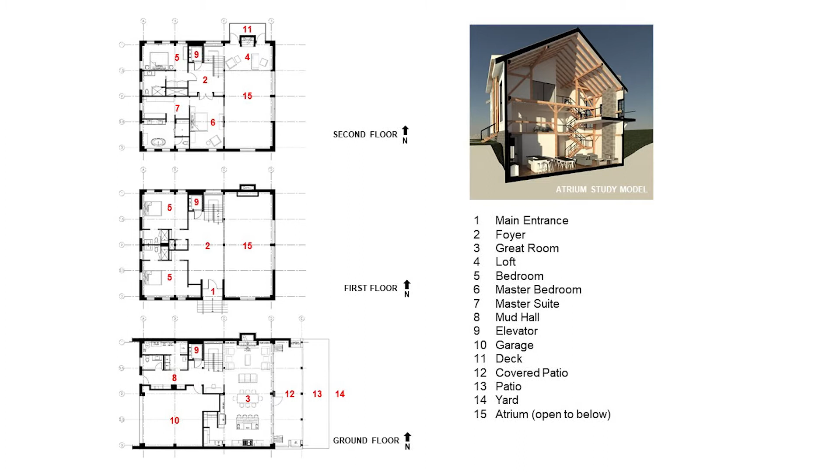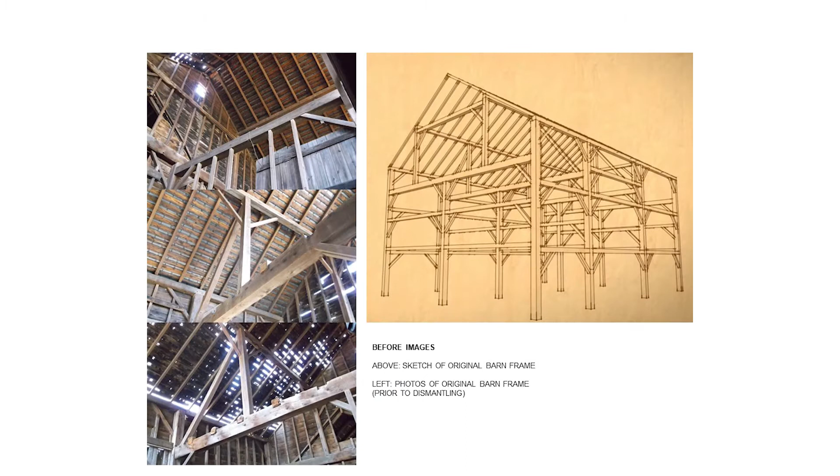Transplant barn. Jen and Phil dreamed of a house to serve as a generational gathering place for their family. They envisioned a new atmosphere that reflected their unique personalities and was rich with history. Jen's strong sense of simple design and Phil's New York State roots led them to a structure that once served as a hay barn in a rural area near Schenectady, New York. They decided that the dismantled frame of this old barn, an early 19th century heavy timber structure, was destined for resurrection 500 miles away on a wooded lot in Hudson, Ohio. Its skeletal frame would be transplanted and their house would be built around it.

With such a clear vision outlined by the clients, the architect's role was to carefully navigate the design process and surgically graft this frame into its new environment. The primary goals expressed by the client were to reassemble the frame as close as possible to its original form, clearly express and celebrate the heavy timber members, and create the soaring, volumetric feeling of a barn. Obviously, there were very specific programmatic requirements, and much effort was spent to ensure functionality while maintaining the purity of Phil and Jen's overarching design criteria.

The design solution started with the siting of the structure. Influenced by traditional bank barns, the ground floor was set below grade and constructed of masonry, rooting its foundation into the earth. This move provided visual screening from the street, creating a stealth garage entrance on the west and establishing a private exterior patio and yard extended to the east.

Lowering the structure also helped to scale down the massing of the three-level house. The east-west orientation allows eastern sun to permeate the great room in the morning and places the main entrance on the south elevation to formally address the street.

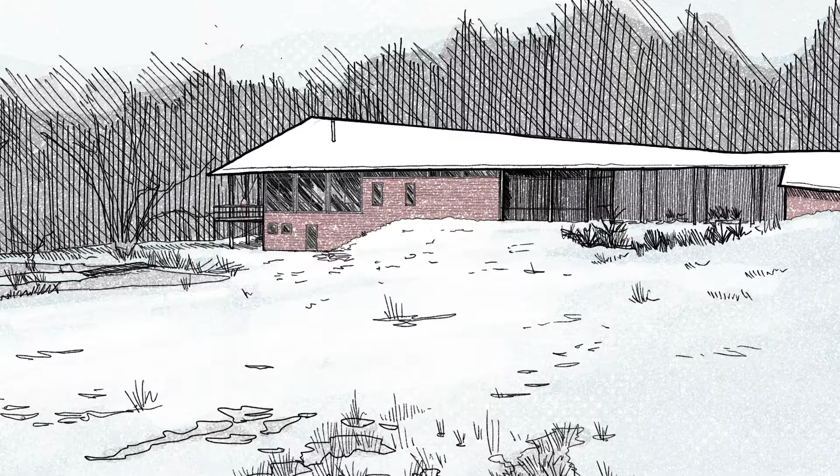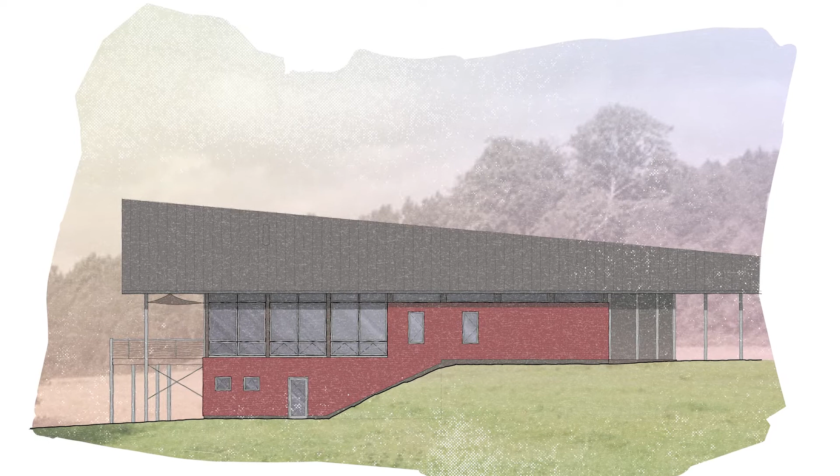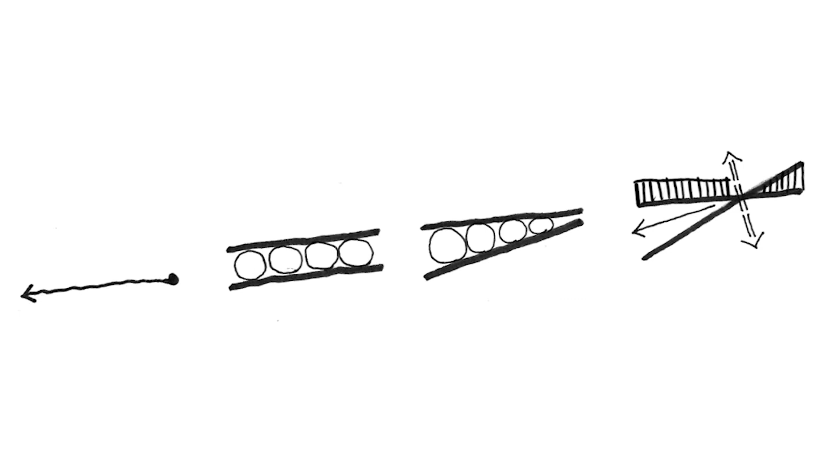Shelter in place. An unbroken roof reaches out long and barn-like, a finger pointing. Our rural practice, situated where cows outnumber people, embraces an agricultural ethic. We aim to master 3 lessons from farmers. Siting: like the modern barn, place-based structures belong because they serve and are in equilibrium with the land that nourishes them. Scale: a modern barn is sublime, and its scale is in measure with the working landscape it inhabits. Economy: ingenuity underscores a lack of pretension, simple forms suited for climate and purpose. Here on fallow Finger Lakes fields, our clients aim to create a dwelling that fits.

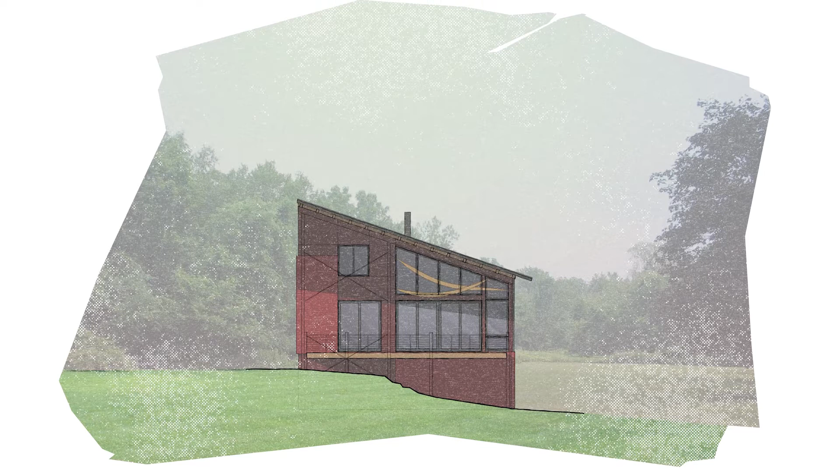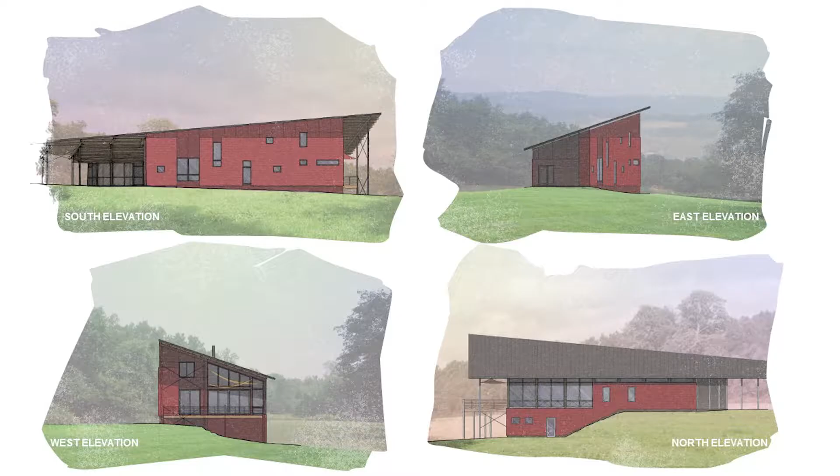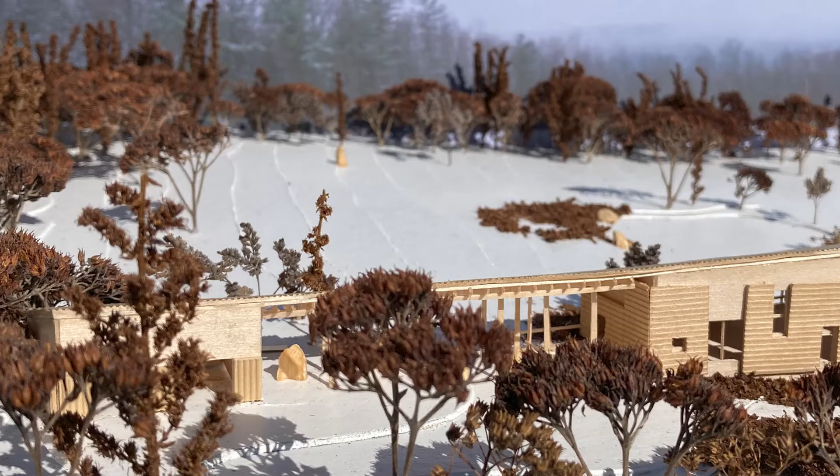This house is not a barn. However, it will be surrounded by a cultivated landscape squarely within the cultural, geographic, and historic context of barns. Heeding the above lessons, the design begins with a linear, roofed form sited to minimize disruption of the field. This line in the landscape accomplishes several things. At its east end, it greets visitors. Pulling away the garage permits a roofed Zen entry garden between, plus shaded outdoor living spaces that frame the landscape. Along its north facade, its transparency and length permit communion with the dark forest across the pond. Its west end culminates one story above the sloping terrain with indoor-outdoor living space aiming at the view.

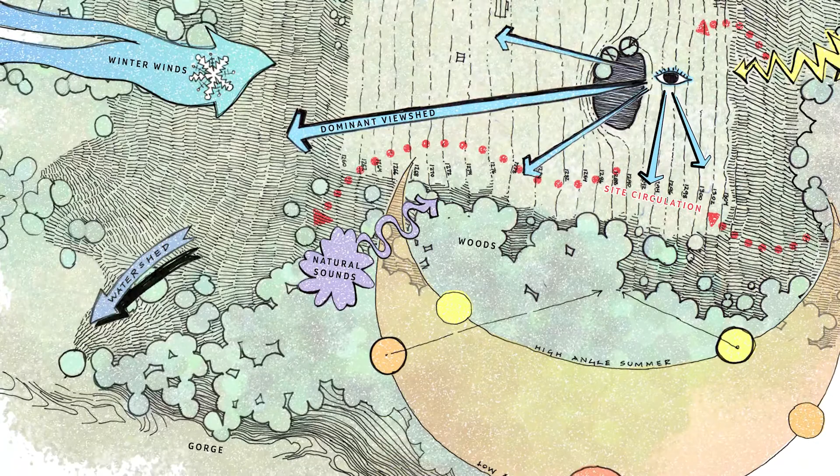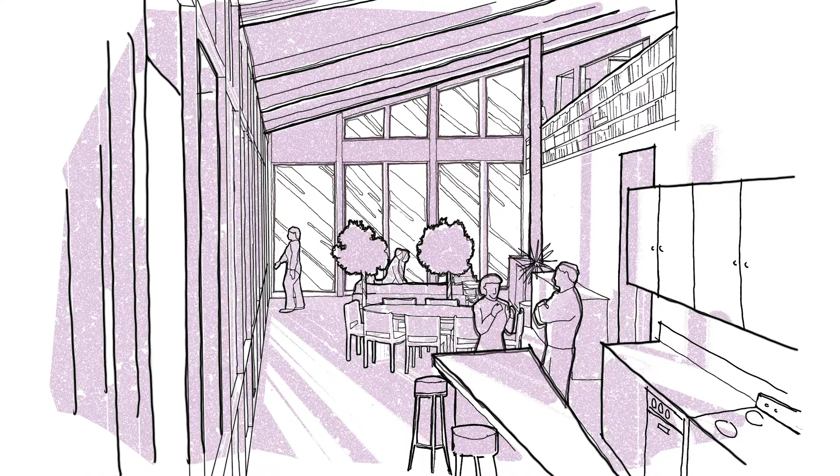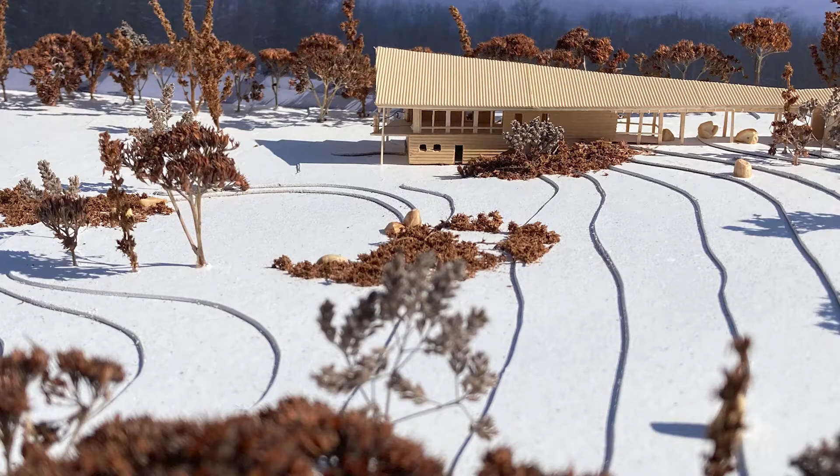All the above could result in a house that looks much like a freestall barn, but for several small changes. Passive solar principles compel us to pivot the south wall 15 degrees east, while the western facade is pulled deeply behind the roof and seasonal shade sails to protect against summer afternoon low rays. The pivot also slims down the house at its entry, shedding unnecessary square footage. The result: all shared living spaces occupy a multiple level room that grows in width and height as one proceeds along that line in the landscape. In the end, the single roof, inspired by farm buildings and chiseled, angled, and stretched by function, amplifies and refines its role as shelter in the rural place.

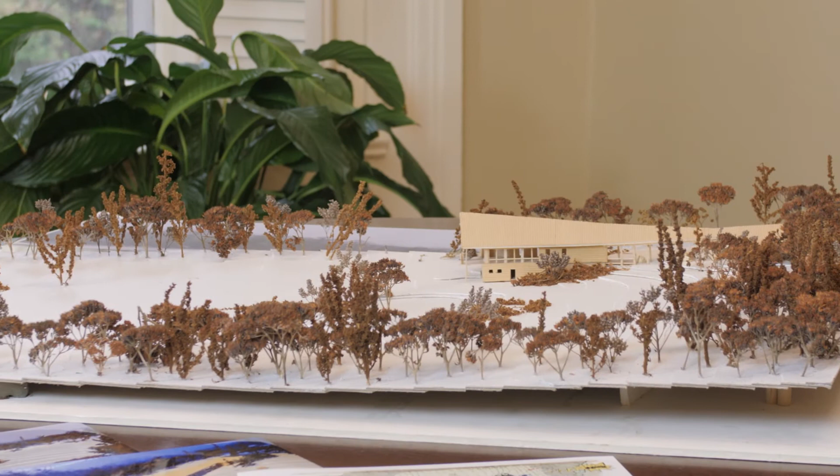To me, the name needs to, in just a few words, frame the way you're going to look at the whole project. For the most part, the words have an opportunity, if you pick them right, to distill down at least one essence or a couple of the ideas. And then you try to do something memorable. In this case, I tried to do something a little provocative.

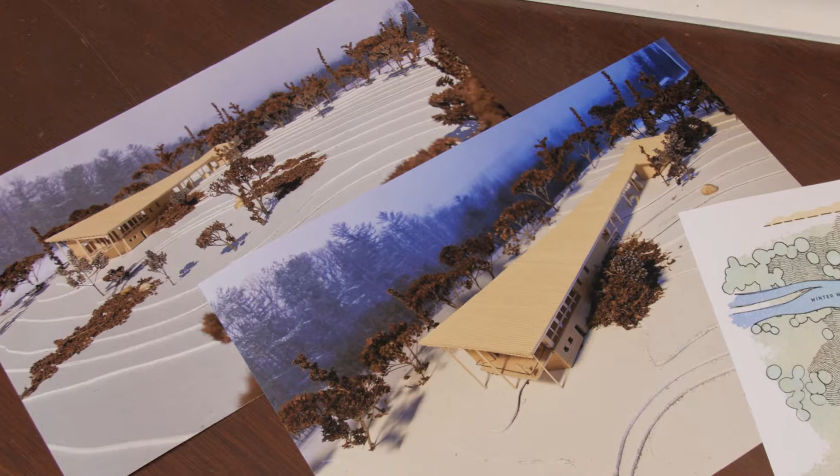Right, I mean, there was a lot of debate in the office about it. People had very different ideas and thought this was a terrible, terrible name. Yeah, because it has a negative connotation. Shelter in place, to some people, it immediately triggers this idea of lockdowns and mass shootings.

That's so interesting. Terrible word. And it is, and I kind of chose it with this very specific goal of wanting to reclaim those words. Those are two of the most important words in architecture: shelter and place.

If we take this idea of the line in the landscape, which is all this really is, it's essentially a barn roof that's then been cut in half, and then the front wall's been pivoted 15 degrees east in order to ideally collect the solar rays and avoid the worst of the western rays on that main passive solar wall. So if you start with that concept, that essentially is the form of the house, and it gives rise to the volume. The rising width and height of the main living space is just kind of the geometric result of those two variables.

Like it just happened that way. And so then you puzzle out, okay, well then how do we respond to that? And the only other thing that's left to do is to say, well, you have south and you have north. South is for shared living, north is for the most private, functional spaces. You have served spaces on the south and you have servant spaces on the north, with a single separator between them.

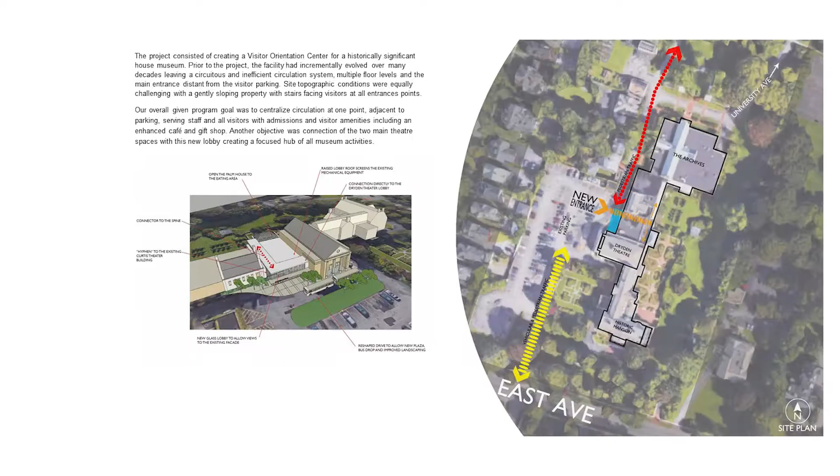Eastman Museum. The project consisted of creating a visitor orientation center for a historically significant house museum. Prior to the project, the facility had incrementally evolved over many decades, leaving a circuitous and inefficient circulation system, multiple floor levels, and the main entrance distant from the visitor parking.

Site topographic conditions were equally challenging, with a gently sloping property with stairs facing visitors at all entrance points.

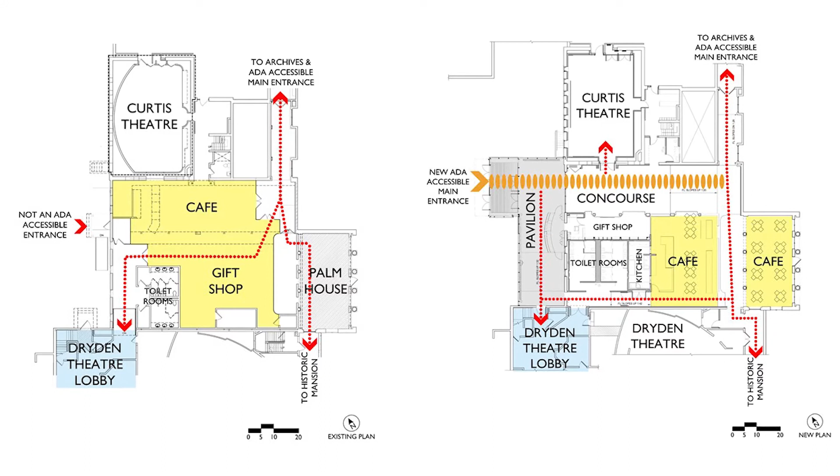Our overall given program goal was to centralize circulation at one point adjacent to parking, serving staff and visitors with admissions and visitor amenities, including an enhanced cafe and gift shop. Another objective was connecting the two main theater spaces, with this new lobby creating a focused hub of all museum activities.

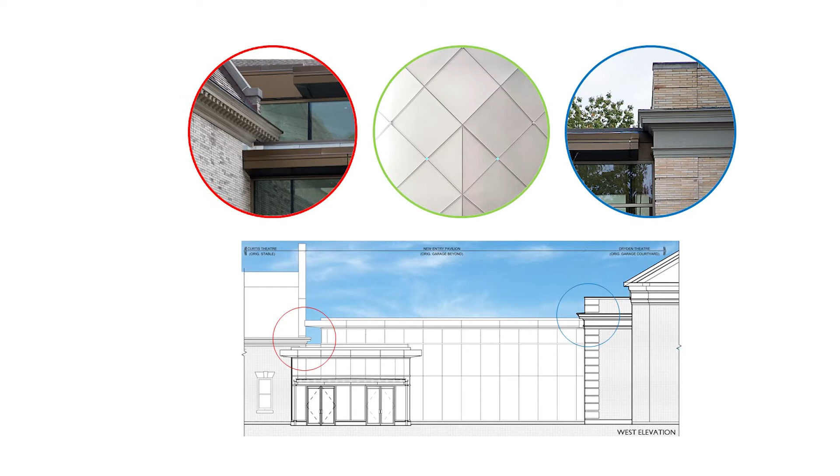The design for the new visitor center was conceived as a lighted vitrine atrium, carefully preserving the historic fabric of the original residence, situated midway between the house and the museum.

The atrium accomplished several technical and program goals, not only weaving numerous site and floor level changes into an imperceptibly sloping continuous floor level, but also creating a visually distinct, iconic entrance point for all museum activities, housing the main admission desk, security and reception desk.

This space allows for immediate access to the existing theater, the new concourse, bookstore, and cafe, orienting visitors to the museum and tours of the house.

A significant site feature of the new facility is the colorama, a framework for the display of large-scale images originally created as transparencies for Grand Central Terminal in New York. This feature creates an interesting frame for the newly landscaped courtyard drop-off area, with the added benefit of screening the existing cooling towers.

They had inherited these transparencies from Kodak that used to be in Grand Central Station, the main terminal. And you'd come off the trains and there was this gigantic 18 feet by 60 feet long image. That became the advertising for the museum. You know, that's what this museum's about.

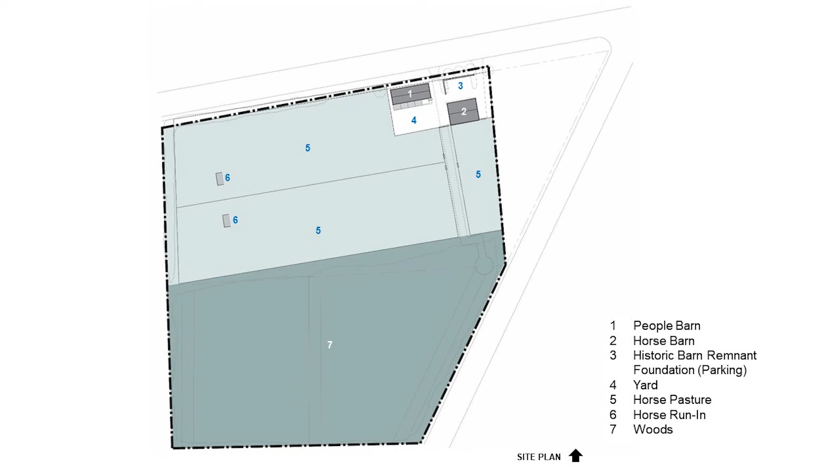Casa Saudade. Located in the agrarian countryside south of Rochester, New York, the former Mendon Pony Club, with its remaining 1930s vintage horse barn and equipment shed, sat idle and horseless for decades. The new owners envisioned a farmette with an immersive visual connection to the surrounding pastures, their horses, and nature.

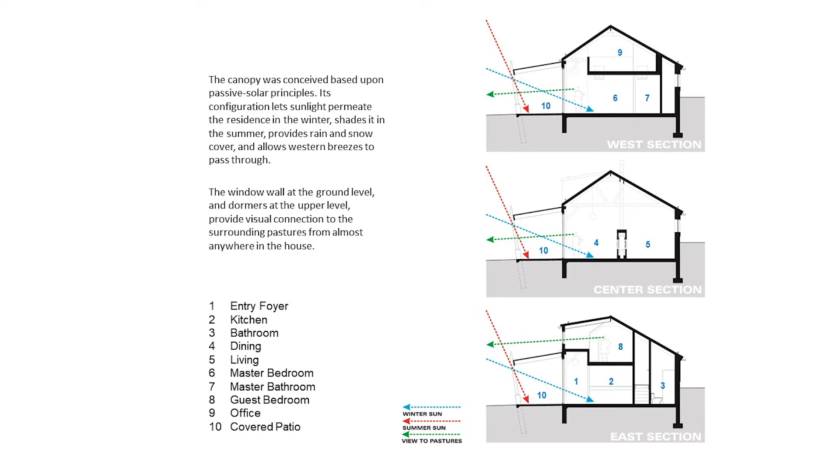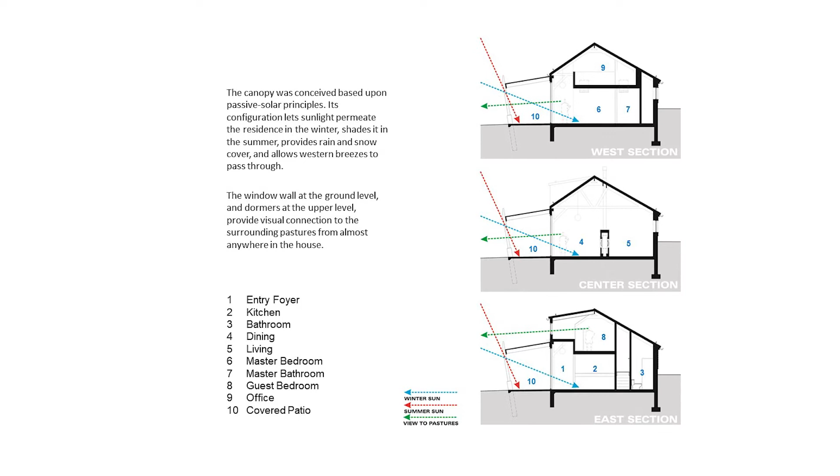Because the horse barn was laid out to accommodate equine stalls, hay storage, and a tack room, it was decided to adapt the adjacent equipment shed into a residence. The 5-bay structure with sliding barn doors and dirt floor had been used to park tractors and store farm equipment. It was built into the side of a hill that sloped south to former pastures and on to woods.

The design strategy was to lift the barn doors up to create a strategic canopy to cover a new patio and offer the opportunity for a 65-foot-long south-facing window wall. The canopy was conceived based upon passive solar principles. Its configuration lets sunlight permeate the residence in the winter, shades it in the summer, provides rain and snow cover, and allows western breezes to pass through.

The original barn door windows remain in place, were covered with transparent corrugated roofing, and transformed into skylights. The floor plan is open, with all primary functions on one level. A new concrete floor slab with integral radiant heat was poured. The roof structure was painted white, and due to its height, afforded a loft space on each end.

Shed dormers were added for additional head clearance, to bring in light, and to provide views. The center space was left open to experience the volume and accommodate a great room. A simple concrete block mass serves to divide the space and provide the hearth for a wood-burning fireplace. A central bifold bay of windows enhances circulation flow and reinforces the connection of inside and out.

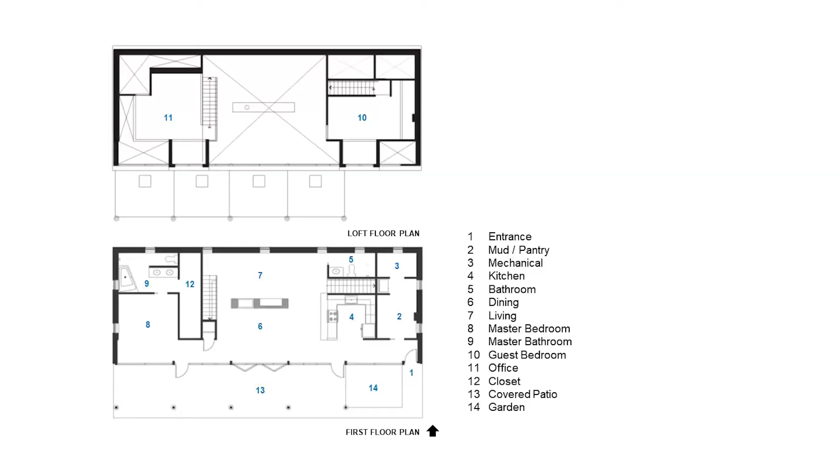Upgrades to the site include new pasture fencing, new utilities and gravel drives, and an array of solar panels installed on the south face of the horse barn roof, enabling energy conservation. An important selling point to the local municipality was how the project stealthily fit a new residence into underutilized existing farm structures. From the road on the north side, the property remains virtually the same and continues to contribute to the area's bucolic past.

Saudade, a Portuguese term describing the bittersweet feeling of nostalgia, was the theme of this project and pays homage to the owner's animal-loving fathers. The result is a place that allows for animals and humans to seamlessly commune.

It was an equipment barn, full of tractors, dirt floors, and dead possums and raccoons. And then the horse barn itself was the former Mendon Pony Club, and it was this beautiful interior, these beautiful stalls, and a gorgeous tack room. It was, in my mind, the perfection of a horse barn versus a potential house barn. Chris fell in love with it. I think that day you saw the vision. Well, what I could see is how the buildings were set and how they related to each other, enclosing this small green area, offset from each other, and how the topography graded down to the pastures and then down to the woods, all south facing. Didn't really come up with it quite, we'll talk about the whole design, but just the way the existing buildings were sited, and how that barn was built into the hill, was like, wow, from a site plan standpoint it really engaged you almost right away, as soon as you set foot on it. So she knew what she was doing after Wegmans. I was just getting groceries, I didn't know we were buying property. No, and moving.

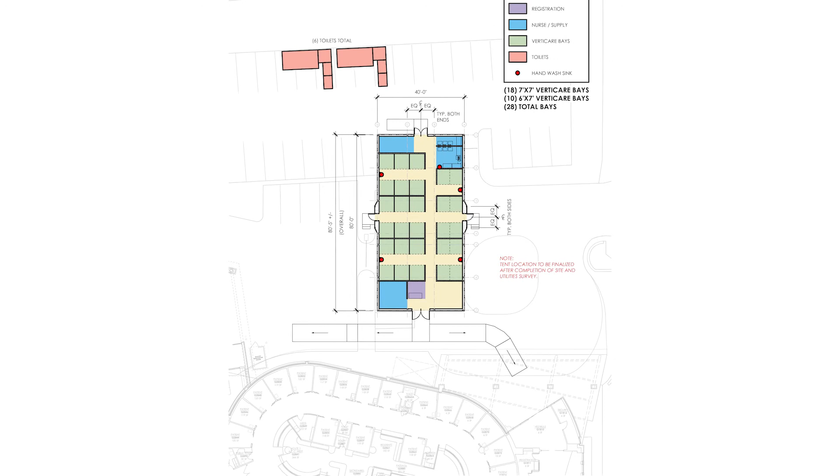This unique project was delivered in a design-build method to meet the client's aggressive 5-month schedule. The project's goals were to build a structure with enough capacity to relieve an overcrowded emergency department, allow for new social distancing in preparation for an anticipated fall COVID surge, and could be rebuilt for any future emergencies. Most important, the patient experience was to be considered, as Dwyer assisted in preliminary research and programming.

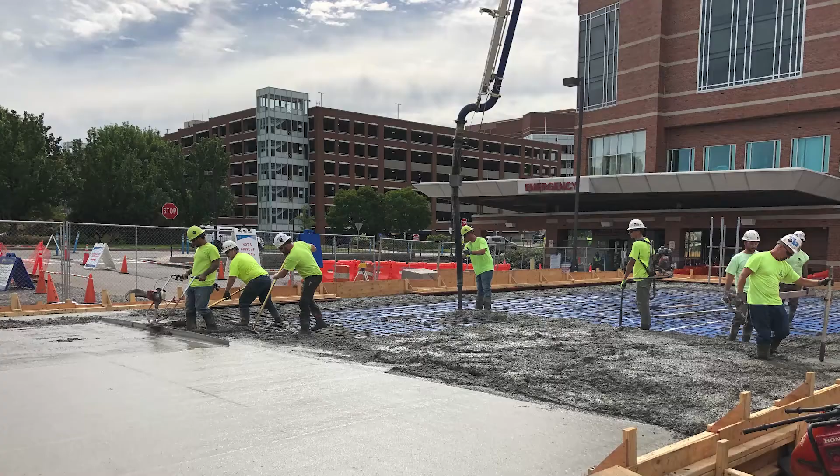With the threat of winter and the elements, several temporary structures were eliminated that could not provide a sound and clean environment for patient care. LaChase Construction was brought on board to lead the construction of the selected 3,200 square foot sprung structure.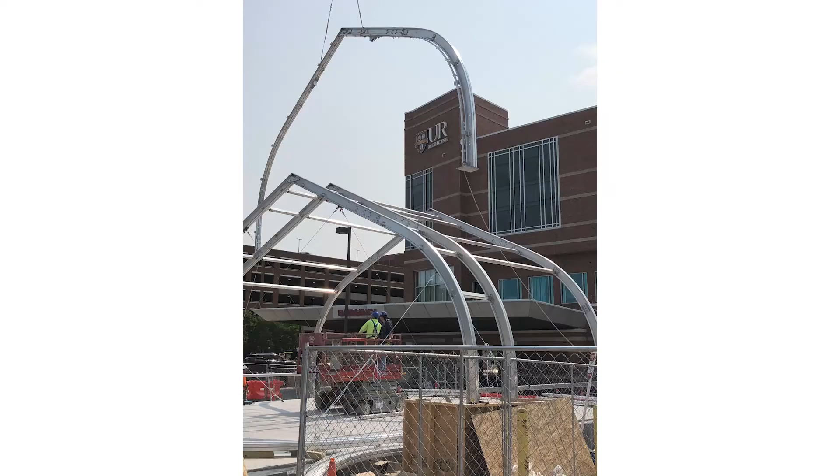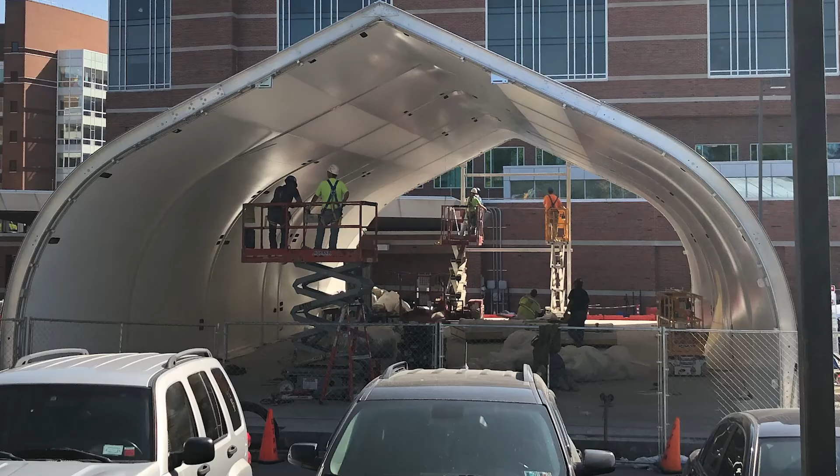Close coordination with the engineering teams helped determine the optimal location of the tent within the existing busy emergency department parking lot. In addition to rethinking and rerouting patient and ambulance traffic, the team had to adjust to accommodate a significant change in grade. A concrete foundation and slab were built to provide a level structure.

Handicap accessible ramps between the tent and both the emergency department main entrance and EMS entrances were constructed and covered in a canopy system to protect the ramps during inclement weather. The resulting structure includes 28 patient bays, a nurse work area, and support spaces.

Keeping in step with the aggressive schedule, the design team researched and selected durable healthcare materials that could be ordered and installed quickly while still maintaining infection control guidelines. Pre-finished drywall was specified for quick assembly, yet an appealing and safe finish for the interior walls. The spacious interior features heating and cooling systems, automatic doors, and power and data sources for optimal patient care.

From inception to occupancy, this project was completed in 5 months, on time and within budget.

You know, I'll give credit to U of R. They picked out this tent, and that was awesome — that was the decision of what was going to be the best way to quickly address this. We had three big goals: one, provide a safe space for the surge; two, we needed to do it quickly; and three, it had to be cost effective. So that's how we ended up with a tent in a parking lot.

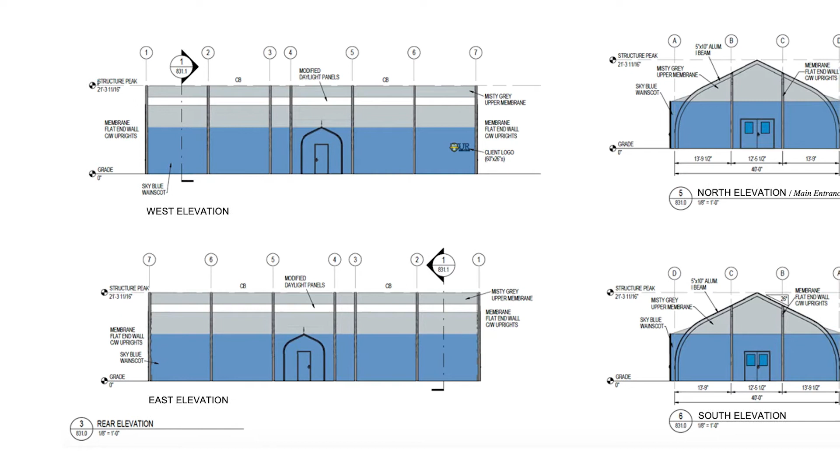So, Community Impact Award piece. Dwyer assisted in the preliminary research to determine the validity of purchasing a temporary structure. Conceptual floor plans were developed to assist the University of Rochester in selecting and ordering the appropriately sized structure to alleviate pressures in the emergency department and to better allow for social distancing of patients to meet the immediate and future needs to care for the greater Rochester area. LaChase was brought on board to lead the design and construction of a 3,200 square foot sprung tent to expedite delivery and construction of the project in a design-build delivery method.

Close coordination with the engineering teams helped determine the optimal location of the tent within the existing emergency department parking lot. Together, this team adapted to the selected location that had a significant change in grade. Handicap accessible and weather protected ramps between the tent, the emergency department, and the ambulance entrance were also designed and constructed to prepare for the possibility of a harsh winter.

This project's community impact was its ability to create synergy and confidence in a time of uncertainty, not only for the community it serves, but for the professionals that came together to build it. This temporary structure had a very solid, all-hands-on-deck, unselfish foundation. This project began because of one professional feeling helpless, asking, "What can I do to help?" This created a conversation starting with the University of Rochester to include Dwyer Architectural, LaChase Construction, Jensen BRV Engineering, ME Engineering, and Passero Associates, who joined forces to make an impact by showing the community we are ready.

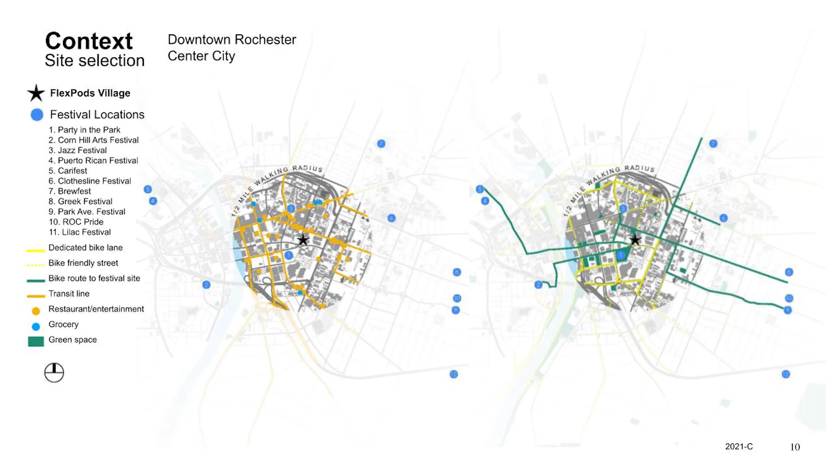Flex pods. Rochester has made a name for itself through its year-round festivals, from the well-known Lilac Festival to the recently incepted Fringe Festival. Rochesterians have learned how to maximize the warm seasons out of necessity. Our experience in hosting festivals draws over 100,000 people each festival. Attendees may retire to one of the area's hotels, rentals, or return home. What if you want to stay where the action is?

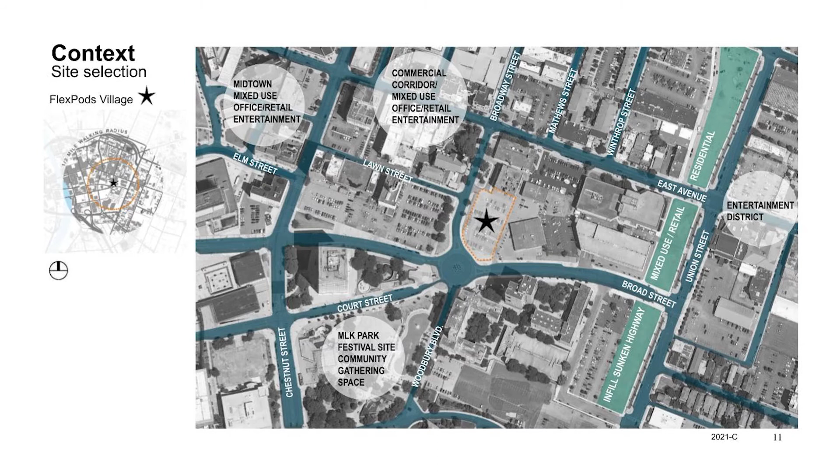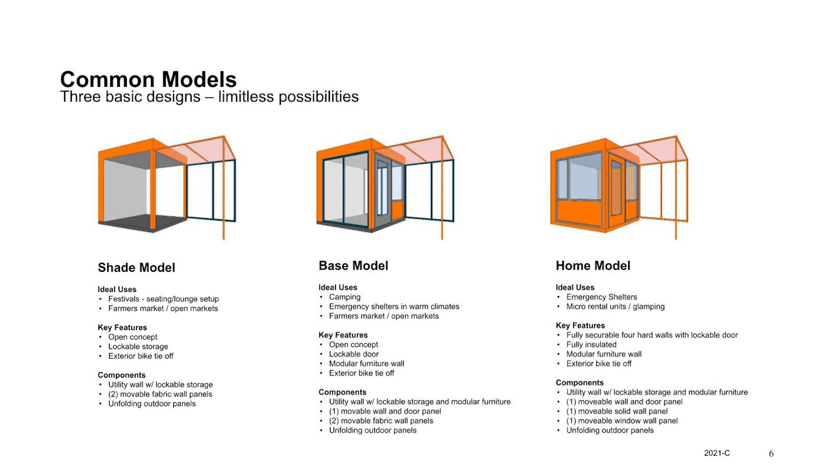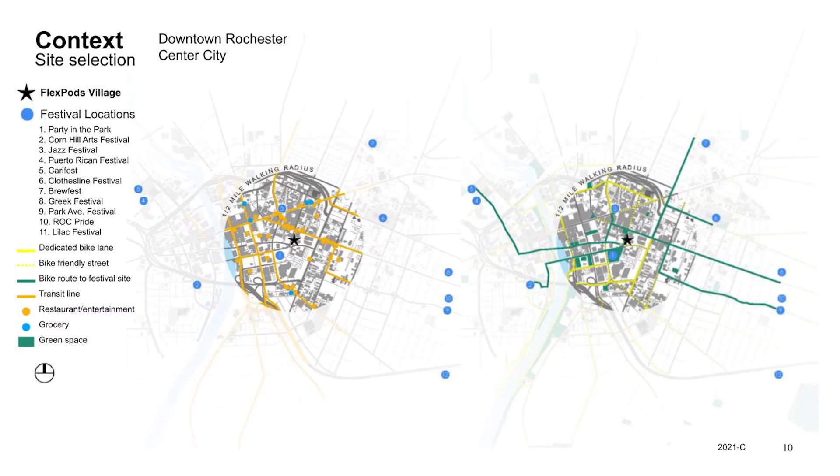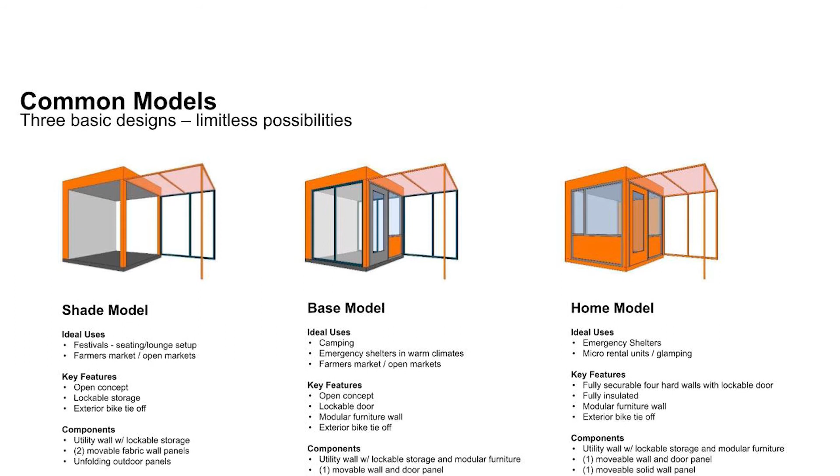FlexPod services the festival crowds and focuses on two primary goals: flexibility and identity. FlexPods can be adapted into various configurations, not only to address the number of occupants, but also weather, privacy, security, and fun. The FlexPod unit is an easily transportable and lightweight 7-foot cube with a solid utility wall panel on one end that includes built-in lighting, roof downspouts, a storage closet, and a Murphy bed. With the bed stored away, the entire FlexPod becomes an open living space. There are limitless ways to combine units, open walls, create shade, block or invite summer winds through the use of privacy shades, glass, solid walls, and more.

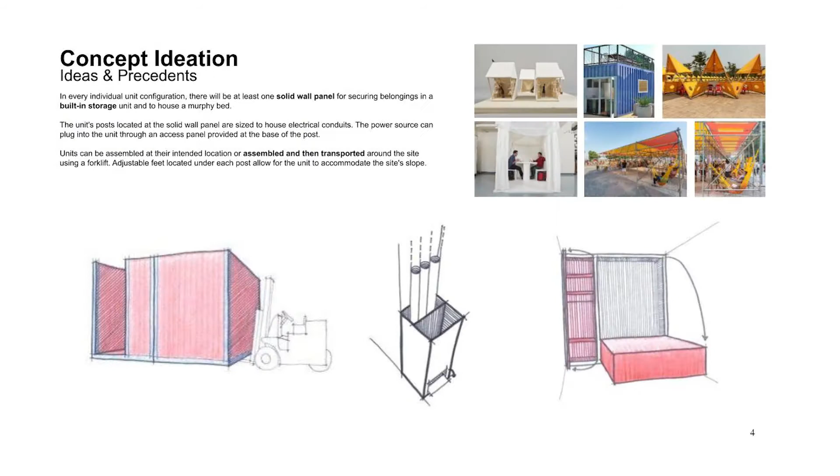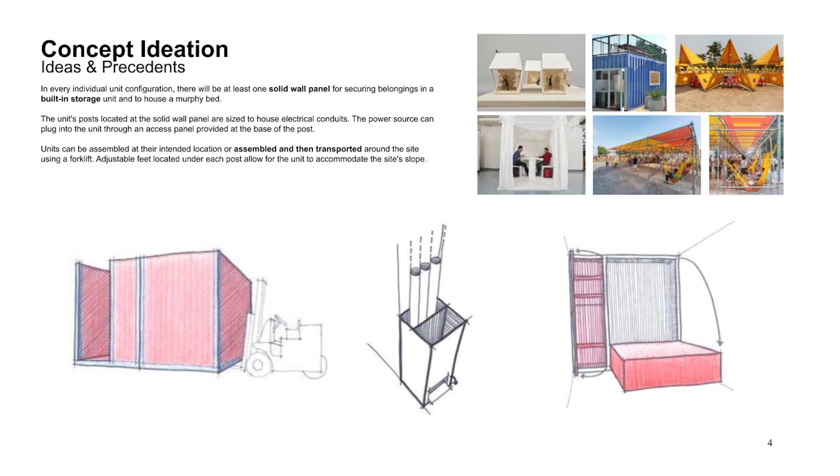FlexPods can be deployed in a variety of applications. Not only can they create temporary communities for festivals, but they can also be used in federal emergency situations as shelter for the homeless and farmers markets.

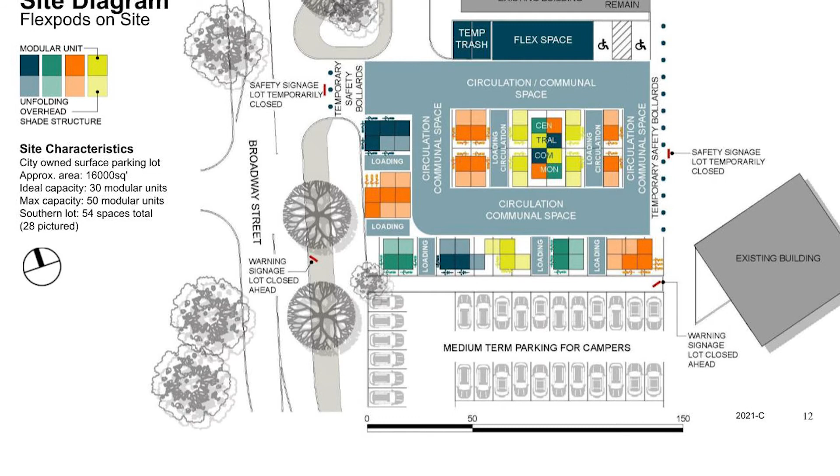FlexPods are easy to reconfigure, creating various conditions with a single unit. The site diagrams demonstrate how units create clusters with varying experiences. The space created between the FlexPods becomes even more interesting than the unit itself.

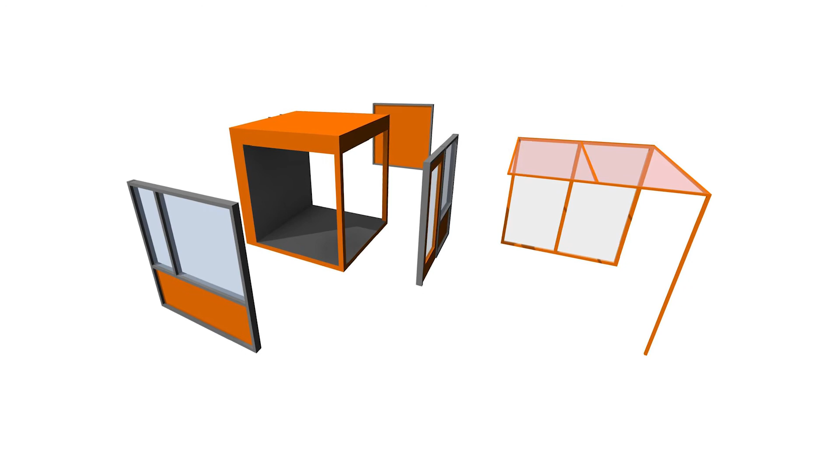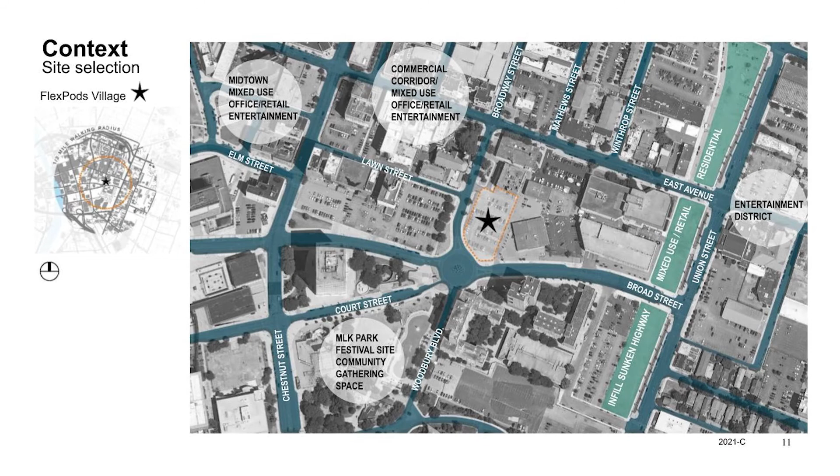The design's focus was not on flashy forms, but about placemaking and enhancing experience. FlexPods also focuses on identity. Each unit has its own unique color and pattern. Identity is especially important while providing shelter for homeless residents. The colors and patterns enhance the festival aesthetic and aid in wayfinding. Units can also be sponsored and branded by local companies to generate revenue.

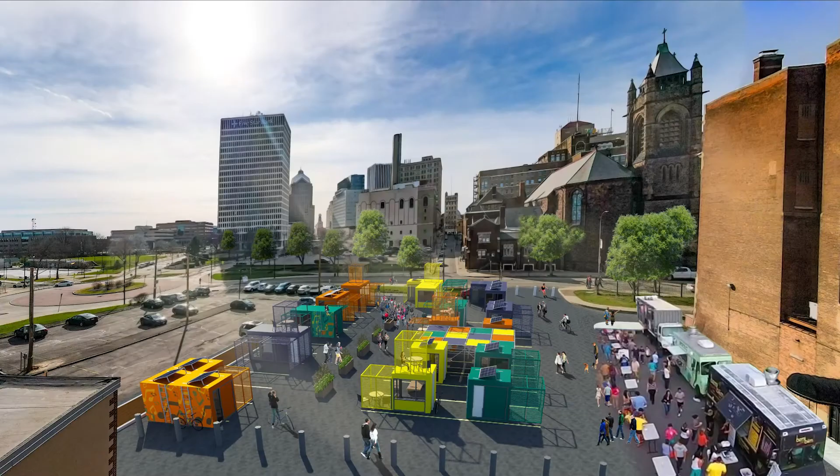FlexPods conveniently fit on a standard parking space, easily conforming to an open lot. Once unloaded, let the end users customize their experience. The configurations are endless.

How does it evolve into the FlexPods? What's that aha moment where, okay, we're throwing around some ideas, the sketches are flying around, we're having conversations. When does it hit this concept?

The first couple meetings, it seemed like the ideas were either for a quote-unquote kit of parts, or ideas that could transform so the occupant could slide out a door that now becomes a divider for a patio, or they could lift open a door. We decided to stick to something simple that could use both concepts, and focus on the kit of parts, the occupant being able to transform the space to whatever they wanted it to be, and give opportunity for branding, which is where Chris comes into play.

As a whole, we tried to keep that in mind as we were developing the pieces that would come together, how all of the individual units could work and how the environment it would create. How it starts in one spot and kind of evolves into the sustainability of being able to reuse something. So it's not a one-time structure, it's the reuse of something.

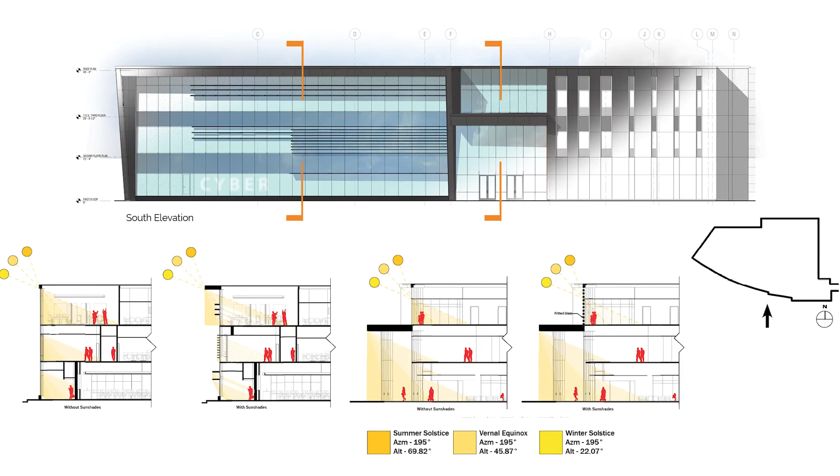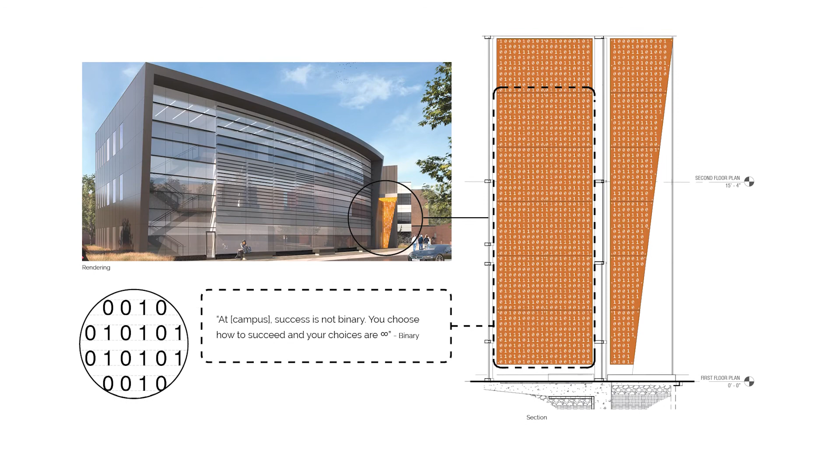Through the fusion of technology, business, and design, the new Cybersecurity Institute will lead the charge in education and research in the cybersecurity field. Situated in the center of campus, this building transforms a campus void into a gateway into the world of cybersecurity. At three stories and over 50,000 square feet, the Institute is home to classrooms, instructional and research labs, simulation and training rooms, collaboration and community spaces, and faculty offices.

This facility will have a major role in hosting special events while showcasing the Institute's research and technology. Situated at the core of the facility is the Cybersecurity Range, or CSR, a space which seamlessly blurs the line between education and reality. The CSR provides its students with a realistic stage for collaboration and problem solving in a high-pressure environment.

Featuring custom displays, millwork, AV theatrics, and unlimited virtual connectivity, the simulated learning environment creates a dynamic atmosphere which can be altered to intensify a scripted exercise.

The design parti challenges preconceptions of cybersecurity as a mysterious profession of hackers and secretive government agencies. The dark exterior envelope embraces the stereotype, contrasted with the transparent south facade and bright interior color palette designed to invite curiosity. As a recurring theme, binary coding can be found throughout the design in both literal and figurative usage, which can be discovered by inquisitive occupants.

A binary pattern translating to 'campus' appears on glazing surfaces, scaled and arranged to optimize sun shading and privacy. Lighting fixtures in each of the three main corridors are arranged in 8-digit sequences, spelling out one letter per floor as you move up through the building. Similarly, the signage at the entrance translates into an inspirational quote, framing the industry experience they seek to gain.